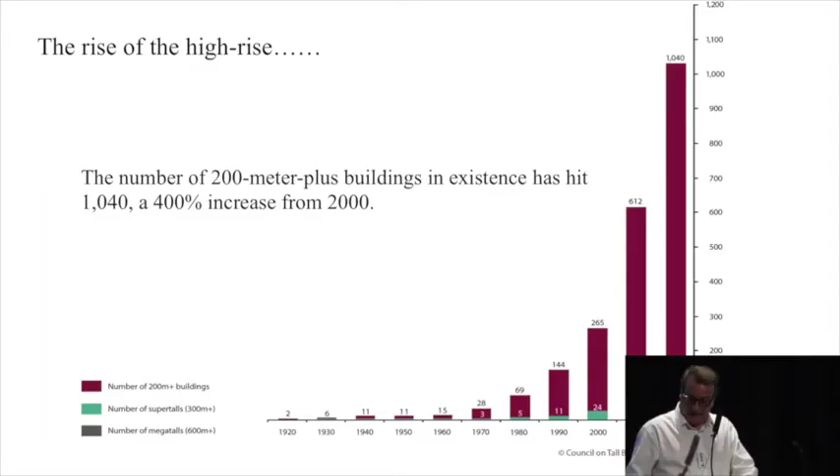And just in support of the pundits, here's a graph. Hopefully you can see that from the back, but it shows the rise of the high-rise. Recently, the number of buildings in the world which were over 200 metres reached the 1,000 mark, and you can see there that it's a staggering rate of progression, 400% more than there were in the year 2000. The demand to live in cities is fueling this, and as you can see, I like graphs.

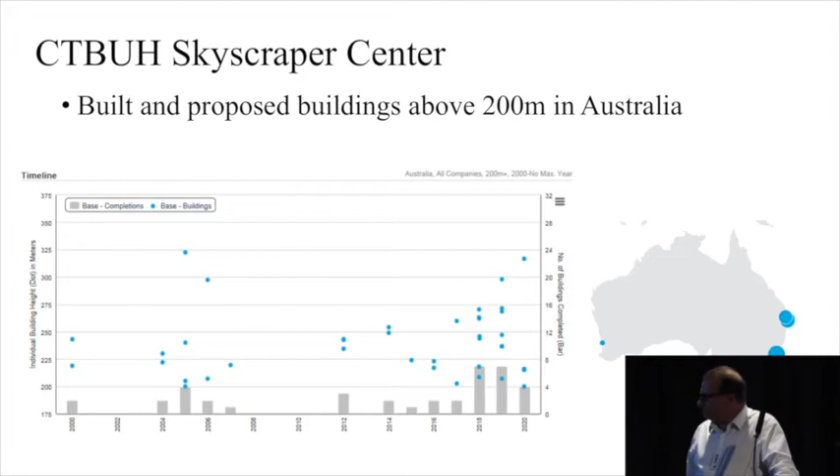And this is a distillation of that, just showing the built and proposed buildings above 200 metres here in good old Australia. 2000 on the left-hand side up to about 2020. So you can see the cluster of activity on the right-hand side, which we're all pretty familiar with, together with the blobs showing the location. There are in fact two blobs there for those at the back, two blobs for Queensland, one in Brisbane, one in the Gold Coast. But a lot of frantic activity.

So I just want to get across a few trends. This is much a personal view, but some things that are definitely happening and things that we need to be mindful of is that there are many more slender buildings around. Well, buildings are becoming more slender. Smaller CBD sites, wanting to go tall, the buildings get more slender. New timber, it's all the rave at the moment. How tall can we go with timber? And also a little bit about the greening of buildings. I say why, and well, I think why not? Makes for a better looking skyline, that's for sure.

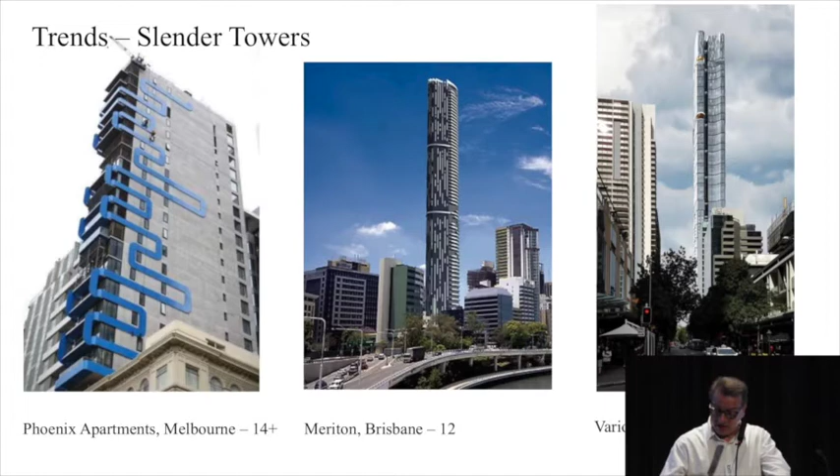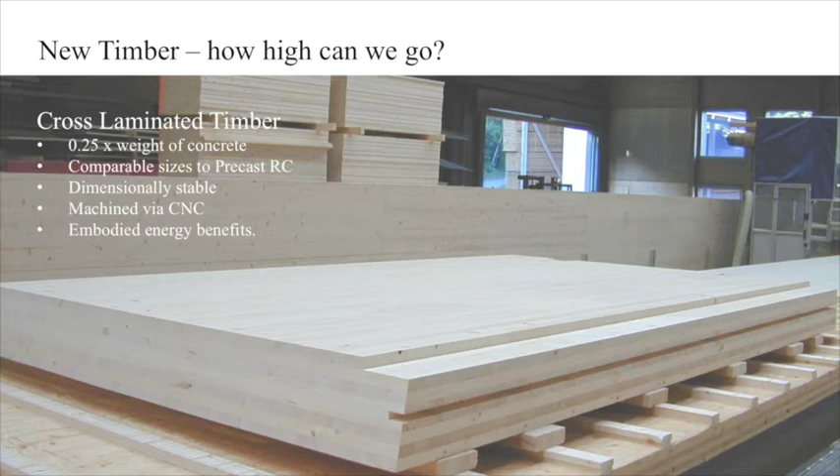Timber. As I say, timber is very much in vogue at the moment, thanks to new engineered products. I think front of the pack is this, cross-laminated timber, the ability to make mass timber sections in a way which has particular structural advantages. It's quite light material, quarter of the weight of reinforced concrete. But I think the big advantage with it, and this is where I do see it becoming more and more the mainstream, is that it's dimensionally stable.

In other words, you can make it somewhere, take it to site, and there's a good chance it's going to be the same dimensions. And it's very readily built for design for manufacture. It can be milled, shaped, etc. by computer-controlled machines, and is very, very good at basically removing work from site and putting it into prefabrication facilities. And of course, it's got some incredible sustainability benefits as well.

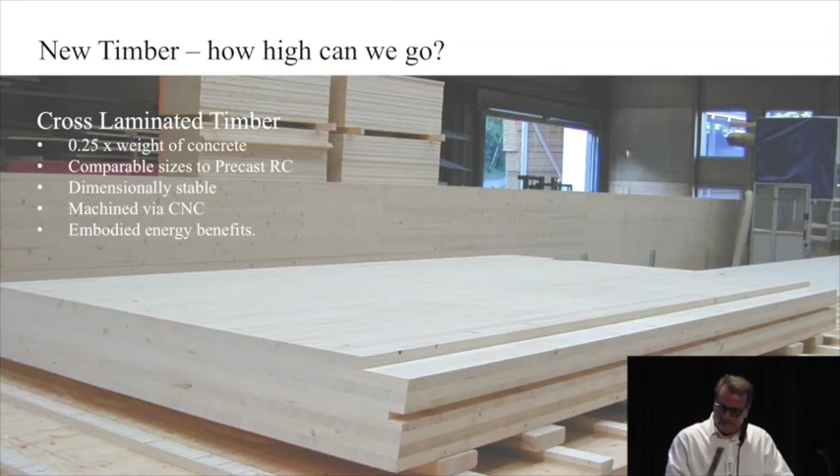This is the Forte Hotel in Melbourne. It was the world's tallest timber building, 32 metres tall, 10 stories. Lend-Lease refined the art of doing timber buildings on the back of this. Key things were, though, that it is very straightforward to erect, very quick. And you can see from the statistics there just how easy that was.

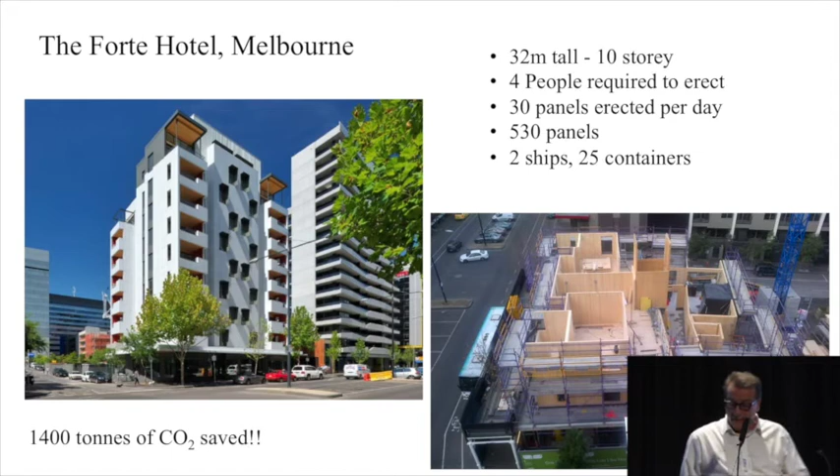Timber's getting higher. This, I think, is the latest tallest building in timber. It's the Treet Apartments in Norway, 14 floors, 62 apartments, 49 metres tall. A different way of approaching the problem. Basically, it's a diagrid on the mega frame on the outside in glulam, and the apartments inside are 4-storey pods of timber, which are retro-installed.

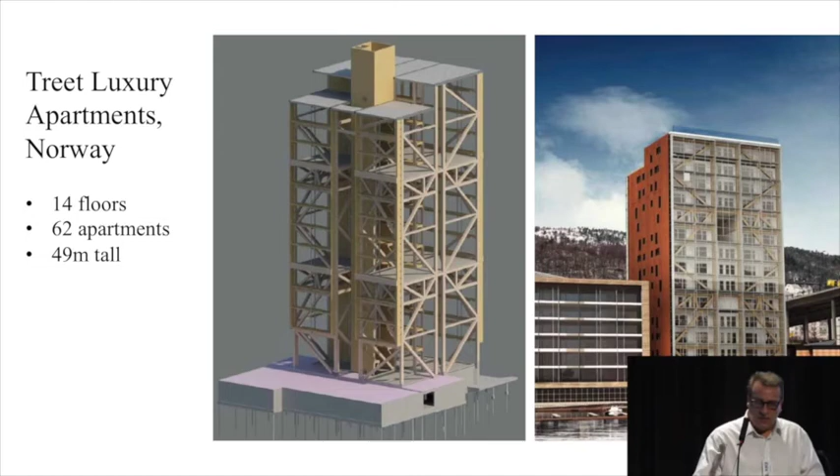People ask me, how tall can we go in pure timber buildings? And I'm mindful of one that might be 84 metres in Austria. But I think this is about the limit. You go beyond this and you're having to vertically pre-stress elements because of strength and stiffness issues. So I think the prospect of going taller means that we need to think a little bit more differently.

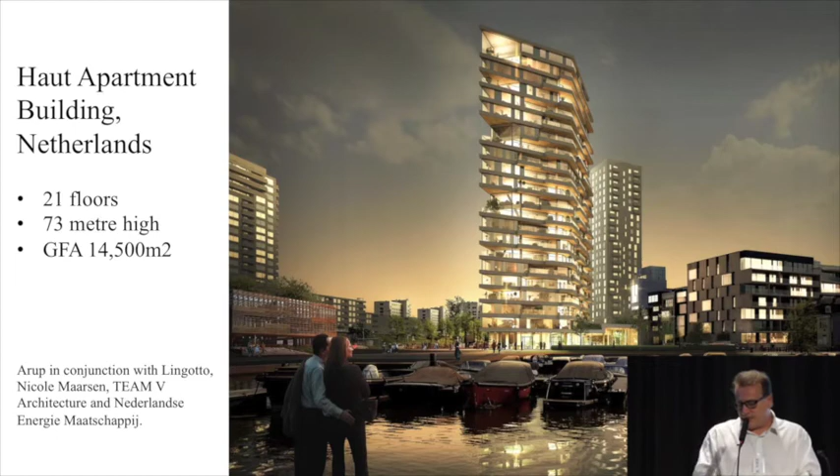And I'm a big fan of what I call the happy hybrid. It's a mixture of timber and conventional construction. And this is a good example of it. This is something we did with CREE and Rhomberg and the Austrian government. The challenge was to make a 20-storey tower using predominantly timber.

And the way to do that is to use a conventional reinforced concrete core, glulam timber floor panels, which in this case are composite with a sort of precast concrete slab, and a perimeter timber frame. It was a pretty effective approach, pretty quick to construct, and lent itself to office usage. You can see, we're getting about a 9.6 metre span with an overall structural depth of about 360 mil, which ain't bad.

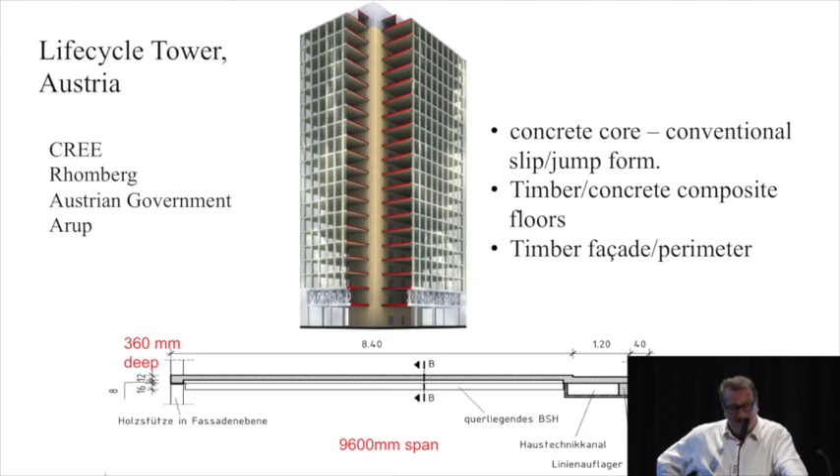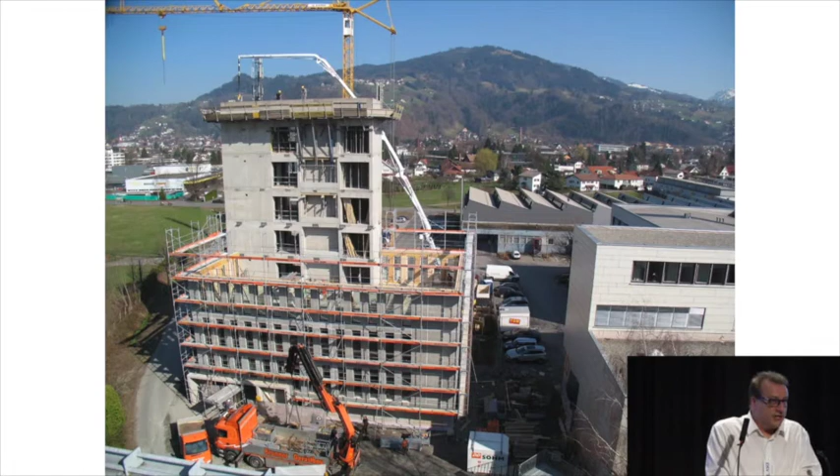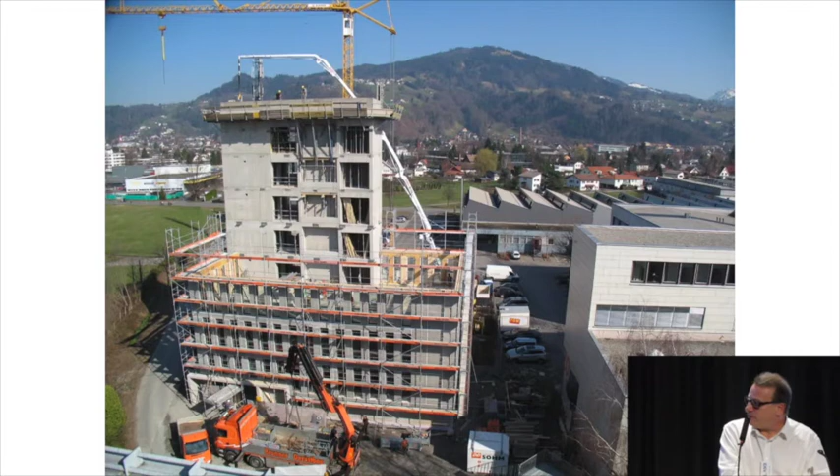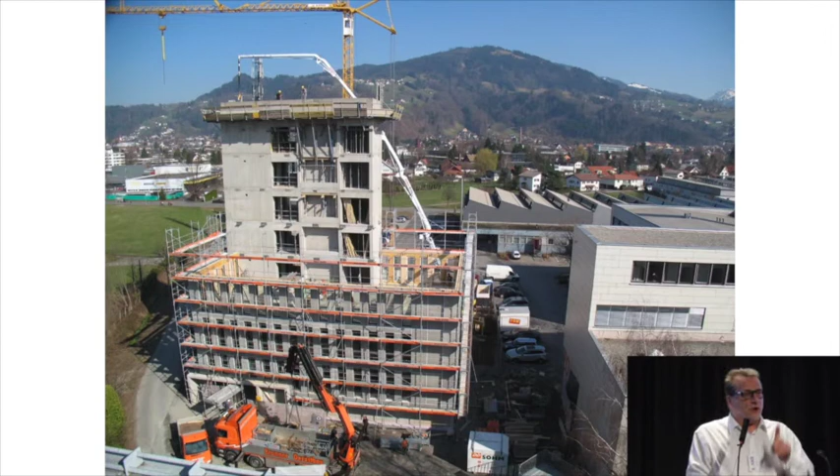And we were fortunate enough to be able to do a demonstrator project, a prototype of the design. And this is it. It's only an 8-storey building, but it illustrates the principle and develops the construction methodology and the design approach. So you can see it's got a conventional reinforced concrete core, slip-formed, and then the floors follow on behind it. Interestingly, the floor cycle time was 1 day per floor. Very quick, very easy.

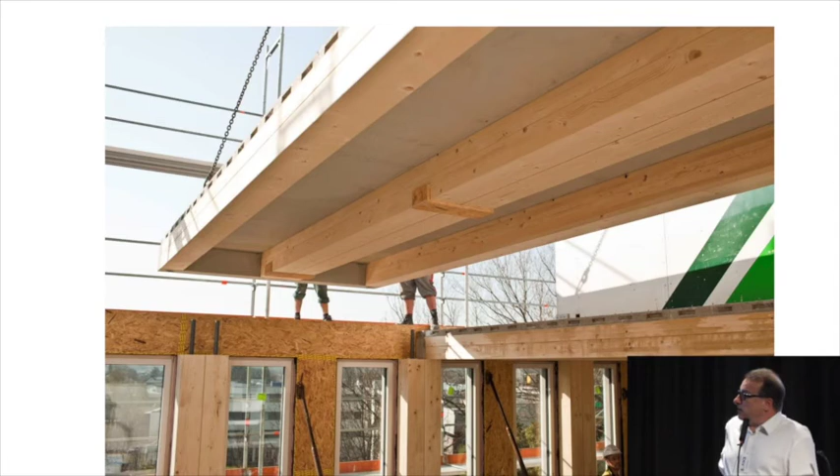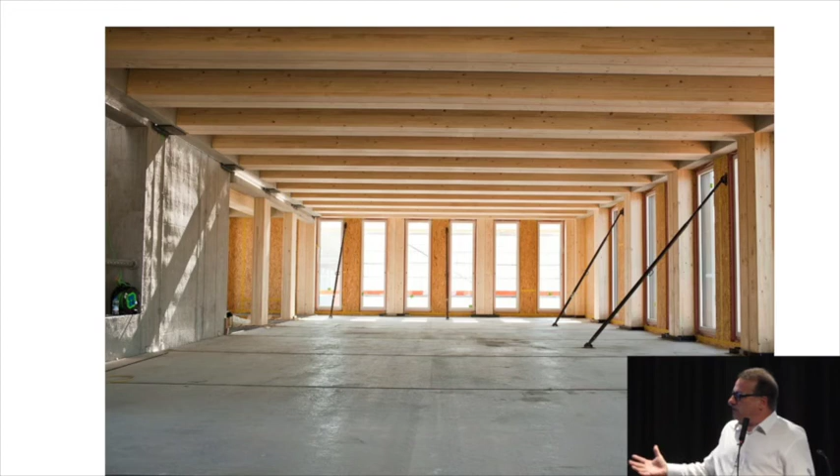And here you can see one of the glulam and concrete slab panels, prefabricated, installed. The slab, if you've got really good eyesight, you can see 2 holes in the slab panel. That goes onto those dowels that are poking up out of the columns. Very, very quick and effective. And when you've put in the last panel, that's what it looks like. It's essentially complete, no wet construction involved, very, very efficient and effective.

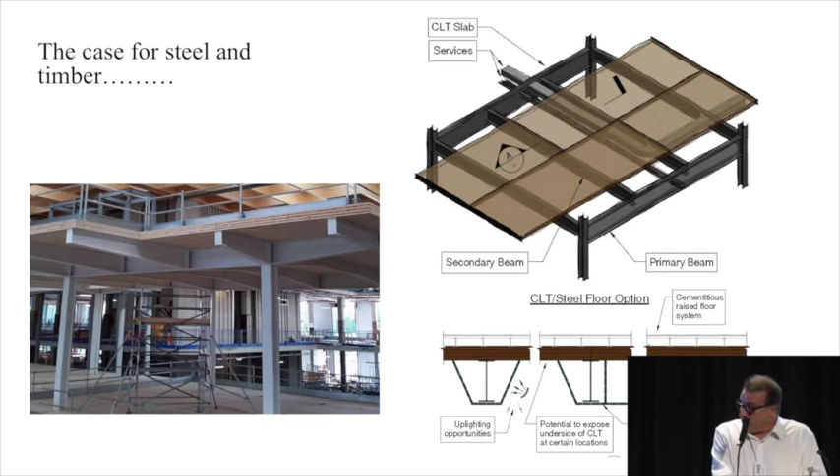And I think you're also going to see a lot more of this. Steel and timber. Timber is, well, not difficult, but it's quite expensive to connect together. So the logic is you make the connections of the timber bits as simple as possible, i.e. CLT slab panels as the floors, and do all the tricky stuff using conventional technology, i.e. steelwork. So this is being used in a number of locations. With the advent of CLT production here in Australia, I think this is probably something that we're going to see much more of.

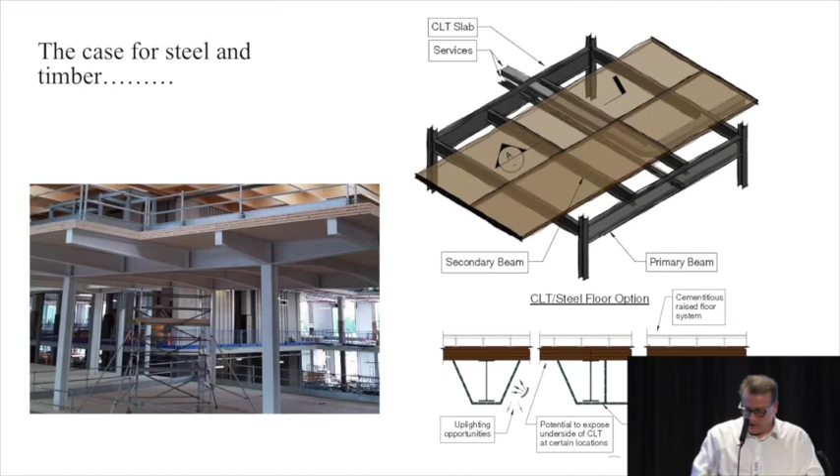And just a couple more slides. Again, another little bit of a plug for CTBUH stuff. Yeah, green buildings. And I mean green in the sense of visibly green. These are downloadable documents from the CTBUH website. Look out for tall buildings in numbers. There's great stuff on all facets of different aspects of design. This one is green walls in high-rise buildings, and you can see from that map it's pretty extensive in terms of the push and initiatives that are being undertaken globally.

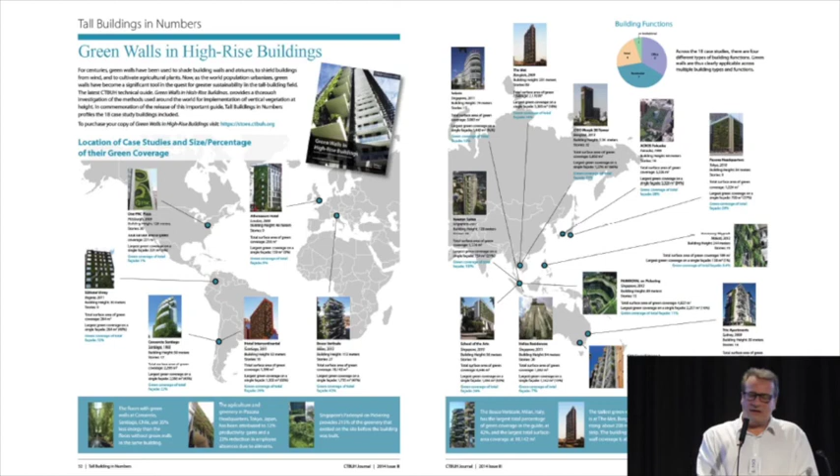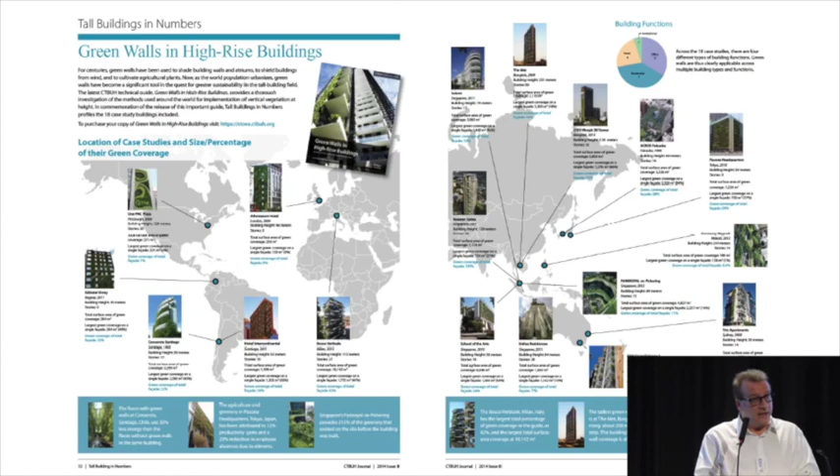And again, it's a little bit of a plug for some publications which are dedicated to promoting greenery on buildings. This is a research document. It's one that Arup sponsored. And it goes into all aspects of the design of the landscaping on this building. It's a rip-roaring read. And certainly, for the engineers out there wanting to have discussions with architects about the potential to green buildings, that's a good guide to buy them for Christmas.